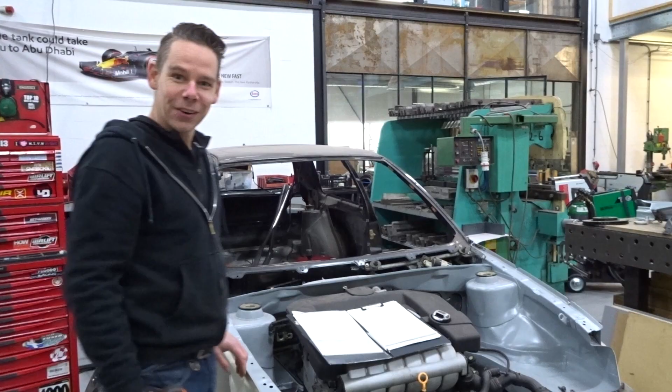Cleaned the camera lens a little bit, that's better now.

I decided I'm not going to use that anymore, so get the drill out. So damn easy, Mr. Donor. Okay, here we go again. Ready?

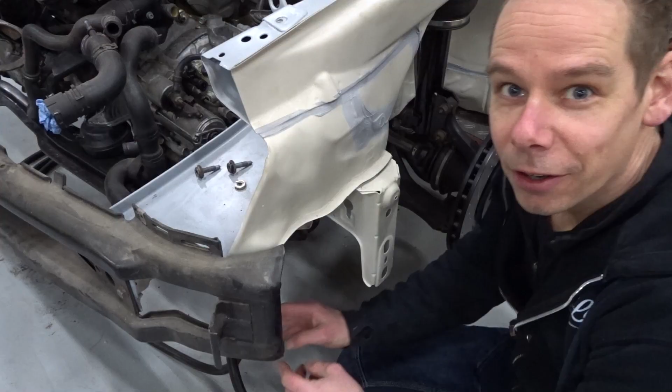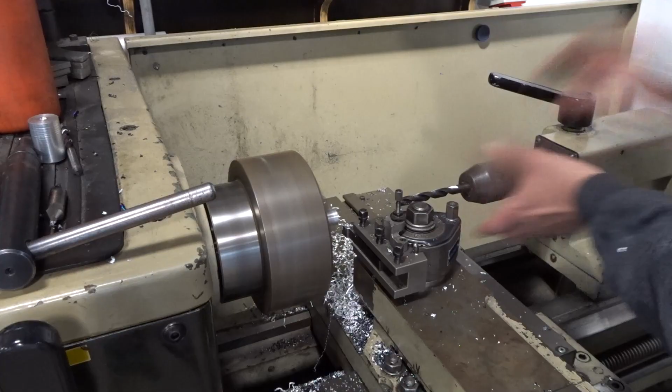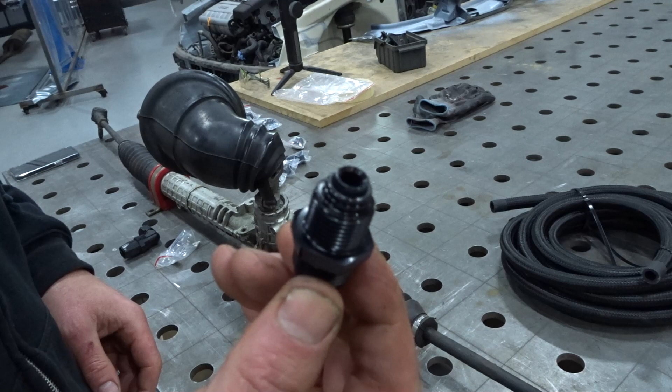Some steering lines, so the list goes on and on. Even not with me, it goes easy. Everybody knows I'm up for a challenge and I like the challenge. There's a special rubber enclosure.

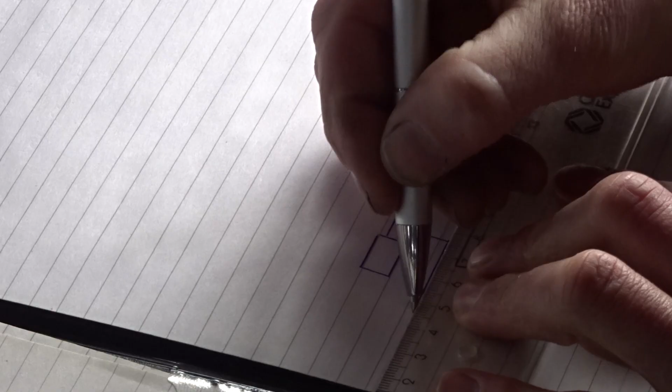We're finally ready for the airco lines. Tomorrow morning I'm en route to get the final discussions with the builder of the airco lines. He's going to make them going upwards from the original point that's going to stay there. Then we're going through the rain tray to the outside of the inner fenders, from the inner fenders straight forward, downwards and back to the pump. Actually, pretty easy job.

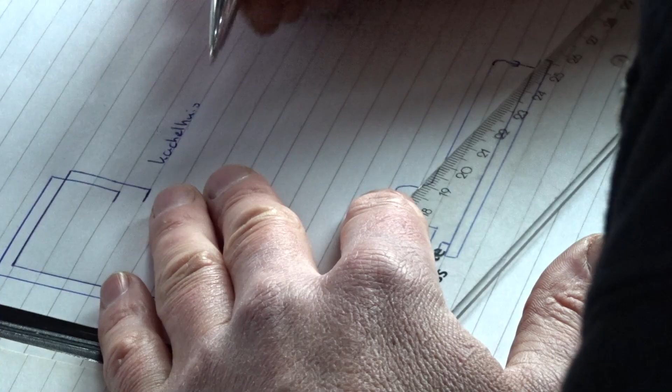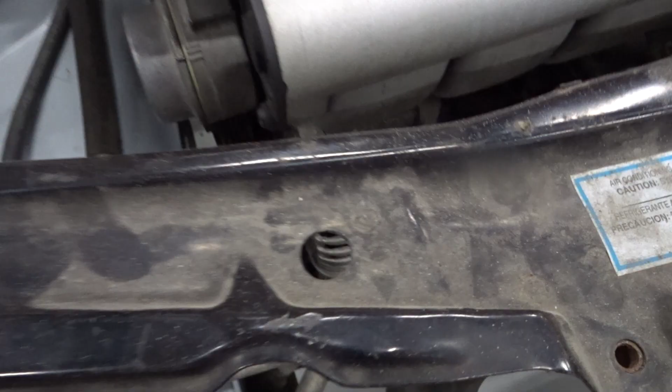Alrighty, another step in this project. We're going to clean out the front. That one needs to go. That one's for the cooler, staying, going.

First, let's clean it.

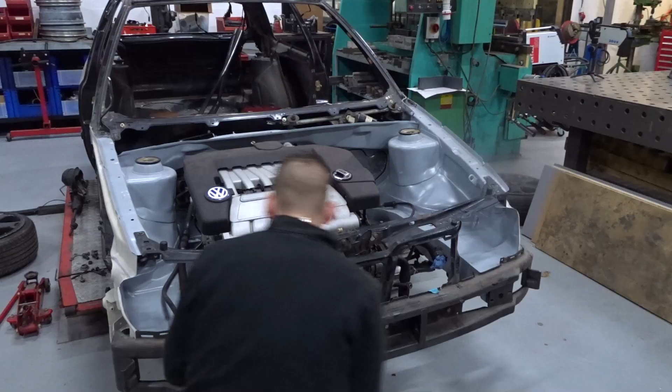Okay, first I'm going to grind down all the paint for the hole that I want to close. Clean the camera lens a little bit, that's better now.

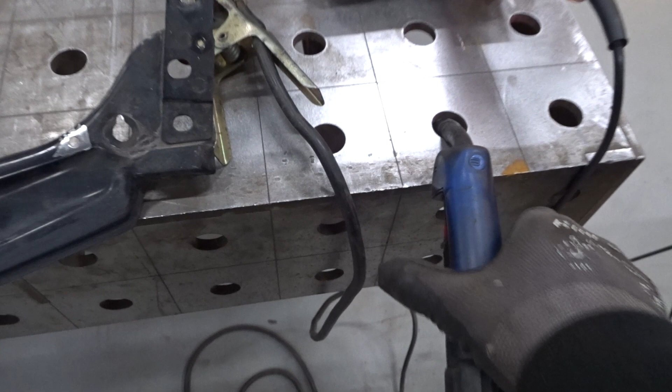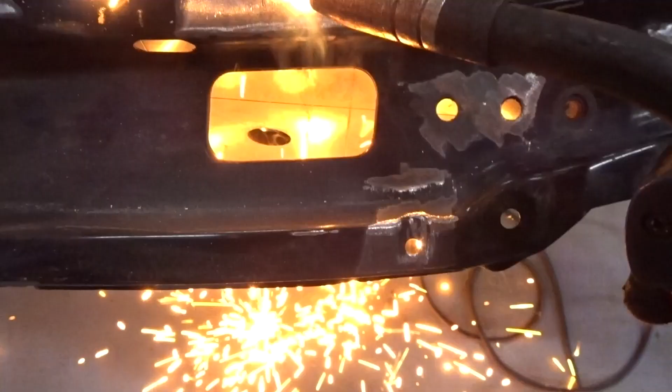Even not with me, it goes easy. A little trick that always works pretty well: take a little copper plate, put it behind the hole, and then we can easily weld it through.

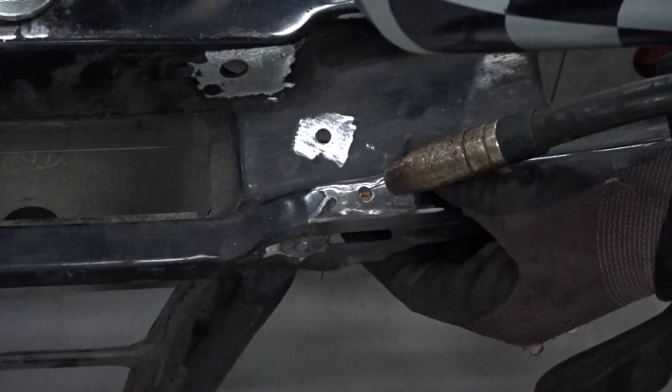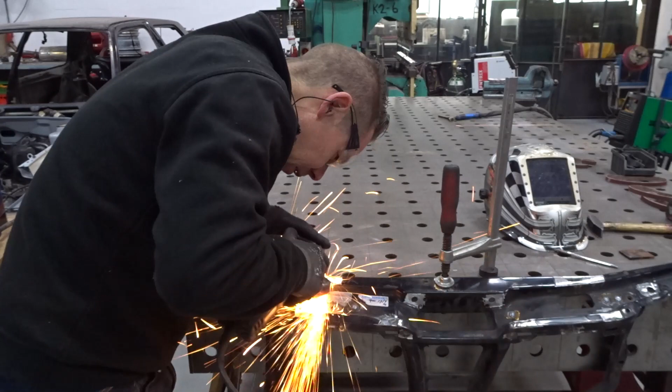The other thing we did, we made with the waterjet some new holes in the brake discs. Oh, that went so fucking good.

Everybody knows I'm up for a challenge and I like the challenge. I came up with this. I got this nice old milling machine which I once made CNC, but it's broken. We're trying to fix it, but it's old, so it's difficult to find the solution and find parts. So normal people go to sleep at night and I start thinking.

Then what happens? I want this disc to be 5 times 108. I got another CNC machine, so that got me thinking. I'm going to make some parts, go to the lathe, fix a little aluminum bushing to align the centers of the disc and the starting point of the CNC machine. And so I think I can make the disc 5x108 with CNC, only then with a waterjet.

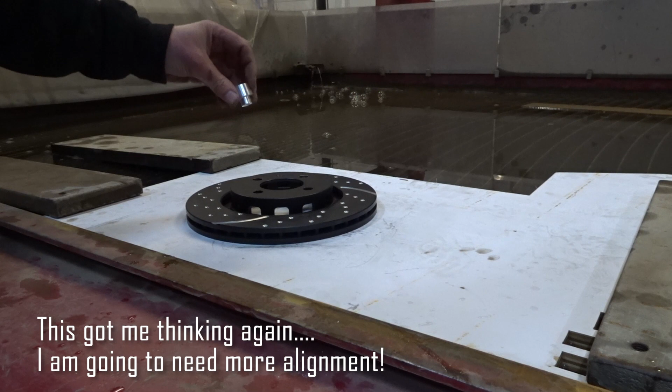Okay, this first attempt was a good idea. I wanted the center on the first hole of the bolt pattern and then cut out a hole where the disc will fall in, so that I would know it's exactly straight. But when I was working on it, I thought, nah, that's not the best idea.

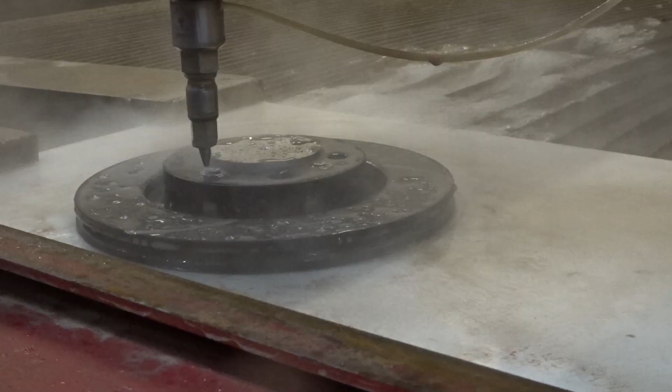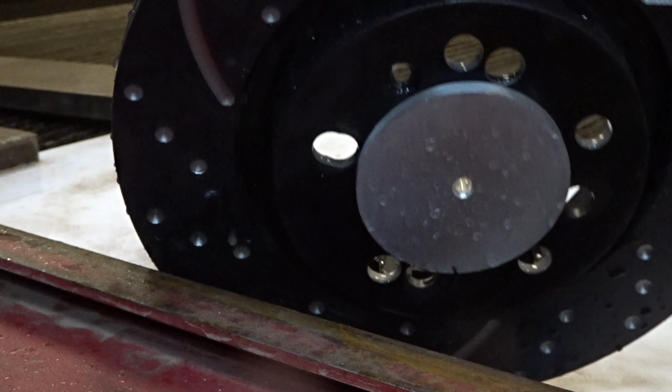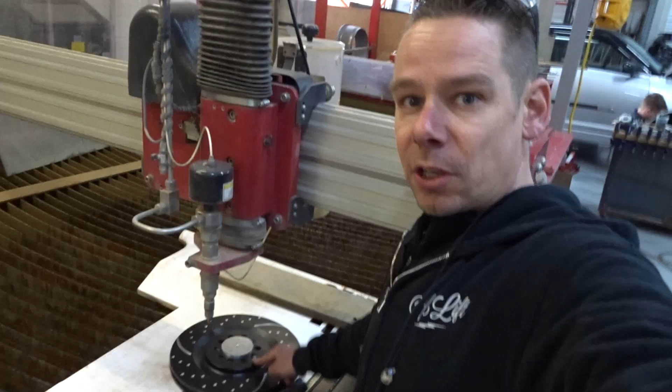Bolt pattern is perfect, better than expected. Now on to the front brakes. Those are a little bit more intricate because they already have a lot of holes, actually 10 holes in them. So the aligning for this will be pretty difficult.

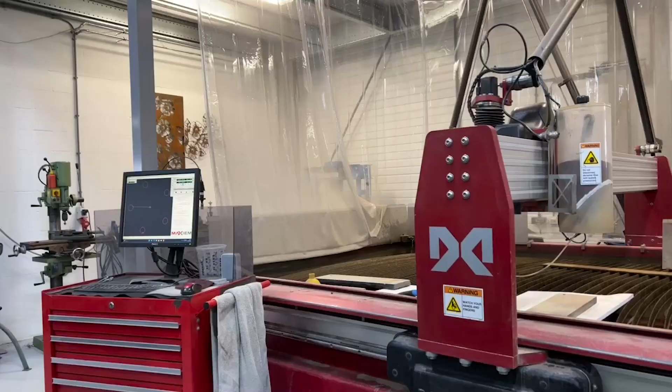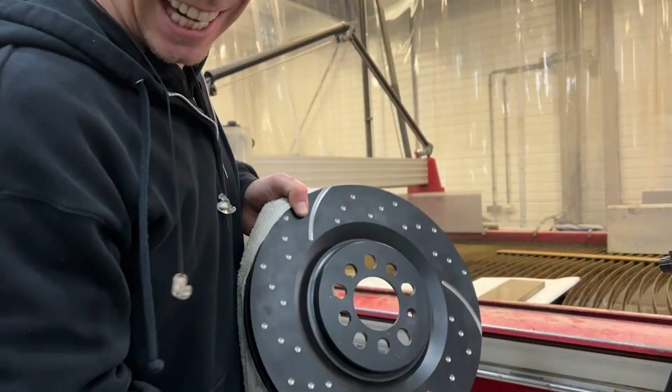These bad boys. Next up, I'm going to take you on the ride to make the reservoir for the steering pump, and get the lines outside of the inner fenders, straight forward onto the subframe.

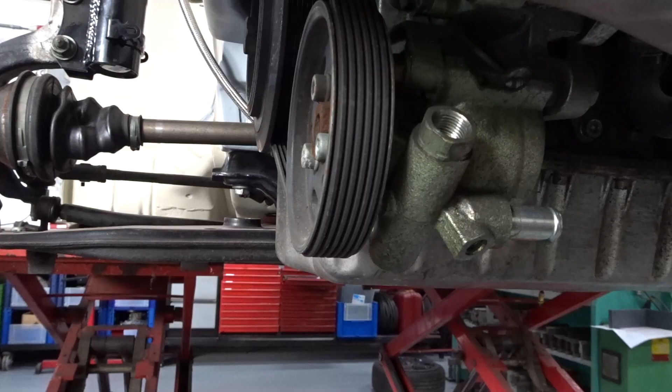Alrighty, some steering lines, more steering lines, and a nice spot for the reservoir. Sketching again. Everything is on the drawing board.

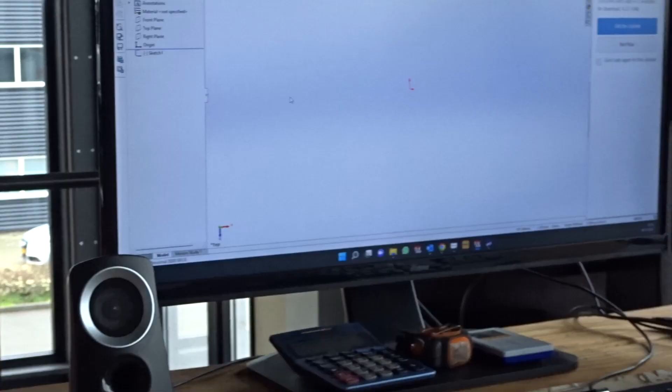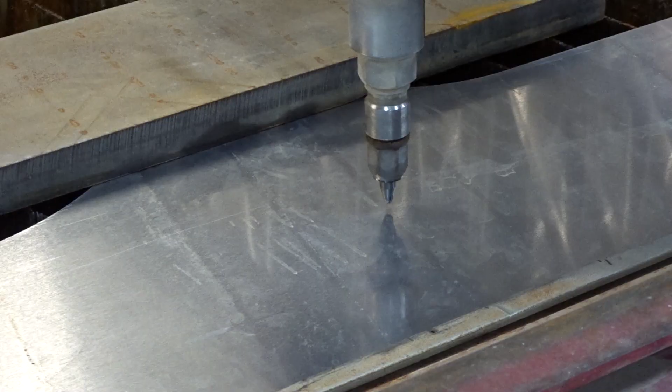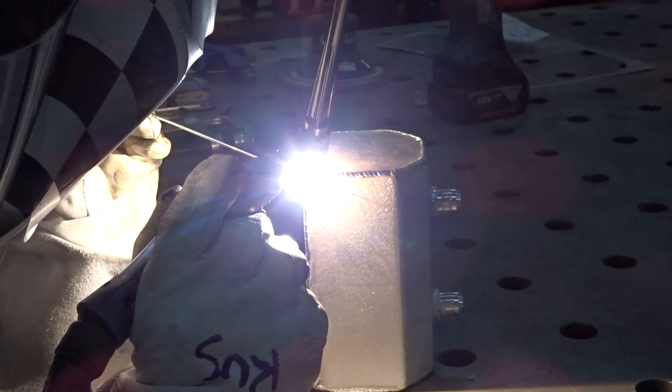Then off to the waterjet. The list goes on, and we're just checking off the boxes for the things we need to do. We're onto the steering rack.

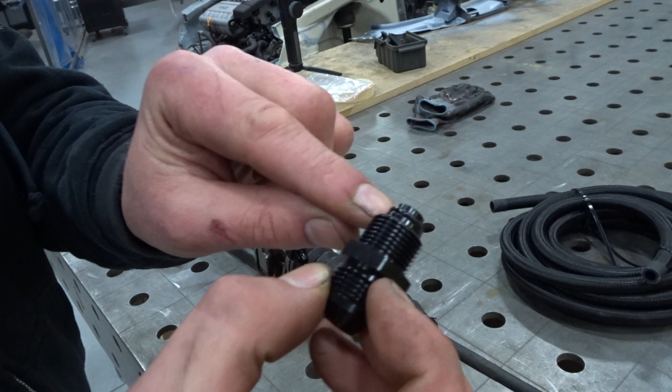We're going to need some special parts. This is one of those special parts that goes in the steering rack to make it an AN fitting, so we can make our own lines and make it as long or as short as possible and route it everywhere we want to go. There's a special rubber enclosure to get it all fitted in the rack.

Over there you can see one bracket, and there's the AN fitting for the steering. There is just no room, so we need to figure out why that bracket's there. Can we remove it? I like removing it.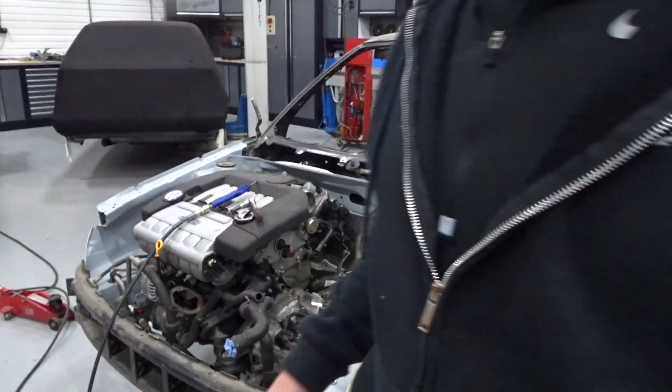Okay, that's done. First steps. Zoom in, come on. Alright, there they are.

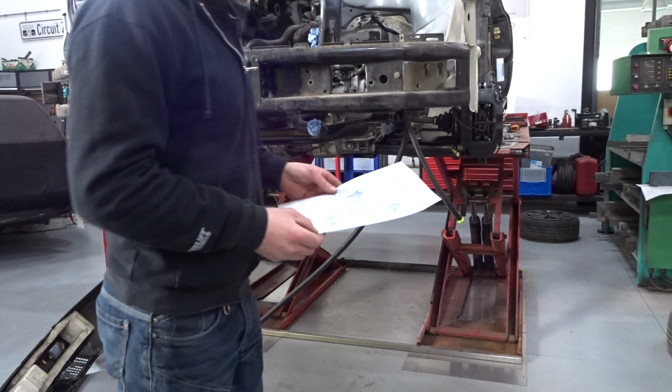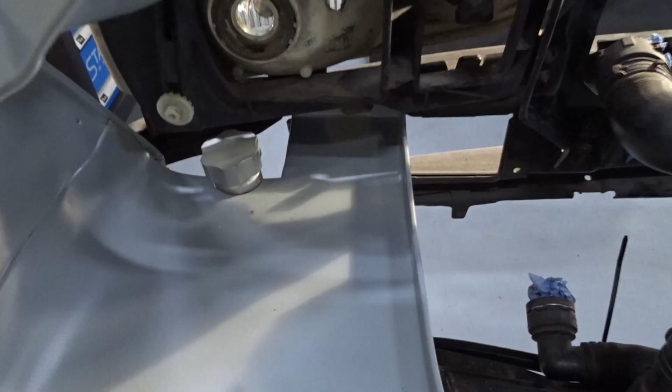Wow, sad looking lady, only one eye, but it means we've got a lot done in this episode. Not as much as I expected, but that's what it is running a shop. There's so much stuff happening always, but that's good for another episode.